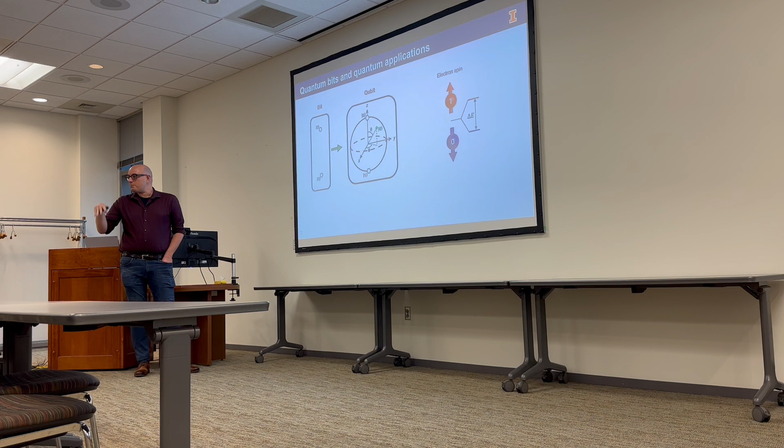You can think about electrons flowing or not flowing through a transistor, encoding 1 or 0, or magnetic domains in your hard drive pointing up or down that encode long-term memory. But quantum physics tells us that we can have more than just occupying one of these two states—we can occupy a larger dimensional state space, which we describe with this so-called Bloch sphere.

If we take a quintessential quantum particle, like an electron, and apply a magnetic field, its spin states, or magnetic states, split into two by the Zeeman effect, giving us two discrete energy levels we can occupy that basically look at that electron either aligned or anti-aligned with that field.

But what this Bloch sphere really tells us, and what quantum mechanics tells us, is that we can also create states that have unique superpositions of being something like up and down at the same time, with a unique quantum phase that describes where we are in this larger dimensional state space.

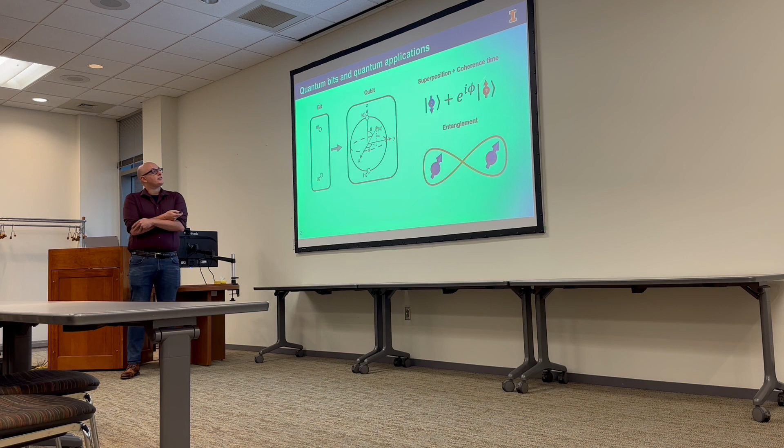When I say the word coherence time, I'm saying: if I create one of these superposition states, one of these unique quantum states, how long does this phase last before it gets scrambled and interacts with the environment? And then, of course, there's not just superposition, there's also this property of quantum entanglement, where the measurements and operations on one qubit can instantaneously affect another.

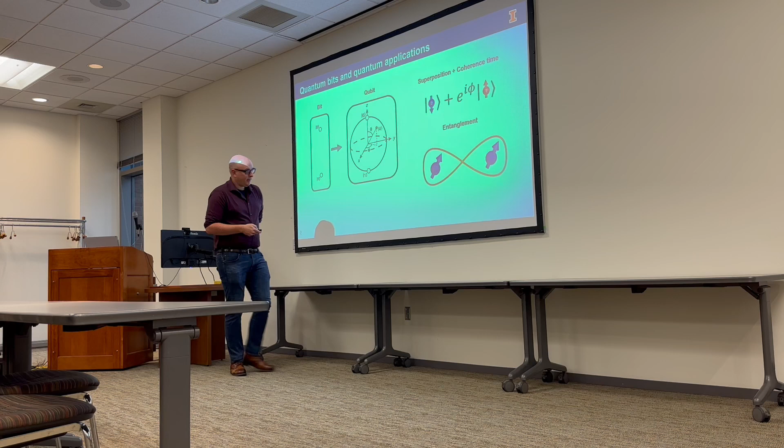And of course, this is famously what Einstein called spooky action at a distance.

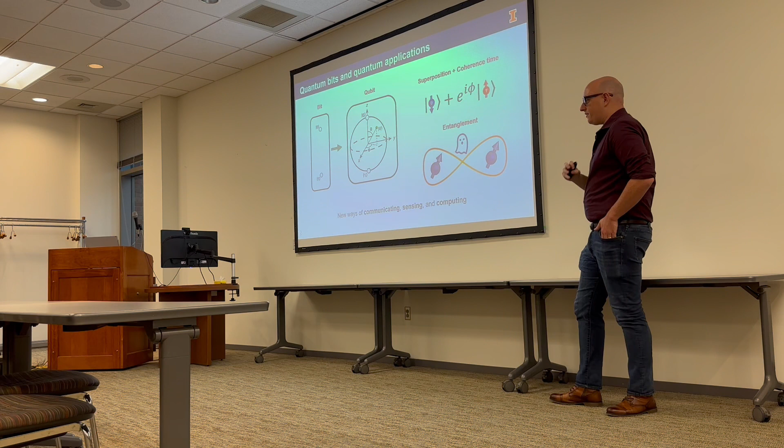The reason people are excited about this is because all of these features in quantum physics let us design and build new devices that give us new ways of communicating, new ways of sensing, and new ways of computing. So quantum computers are this buzzword topic that everyone wants.

But what I'll be focusing on is not quantum computing, but something a little bit different—this idea of a quantum internet.

I'm always in awe of the regular internet, about how our cell phones talk to satellites in space to give us internet, and we have Zoom calls across the country. All of that technology and societal and technological advance is underpinned by this huge infrastructure we take for granted, which is basically the distribution of information at long distances with routers and amplifiers.

Things like modems to hook our computers up to those networks, and then of course the computers themselves that have the capability to do this.

What I get so excited about in my research is, how do we translate all of that backbone infrastructure to the quantum world? How do we build quantum routers and amplifiers? How do we build quantum modems? That's what I'll be focusing on in the rest of the talk.

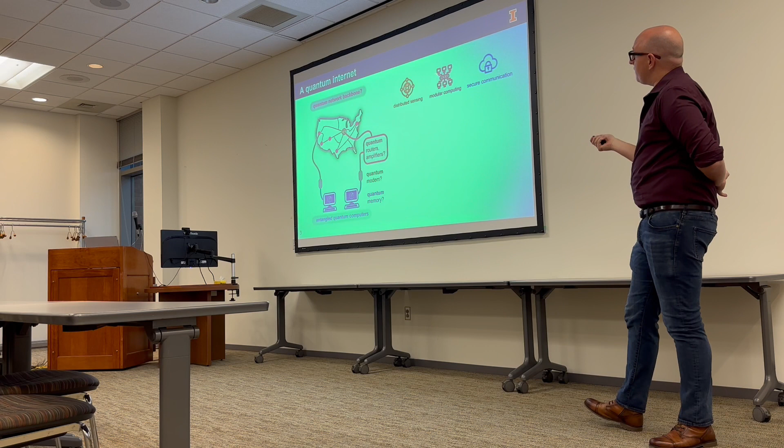The reason you would care to do this is, if you're able to realize this dream of a quantum network or so-called quantum internet, you can do really cool applications like distributed quantum sensing, making modular, powerful quantum computers in the same way we have computing clusters linked by the regular internet, making things like AWS cloud services.

We can do that for quantum computing. And then we can also build things that have secure communications, where our communication is fundamentally secured by the laws of physics, using the power of quantum physics. And so the dream I'm hoping to sell you is taking this quintessential quantum two-level system, a single electron, and then using light to couple them together quantum mechanically.

Maybe I don't have to convince you all, but light is sort of the only reasonable way you could think about doing this, right? Light travels at the speed of light, essentially infinitely fast. It's wide bandwidth, and you can confine it into optical fiber and distribute it all around the city, the state, the country. But maybe what's less obvious is there's also this other feature of photons that we like.

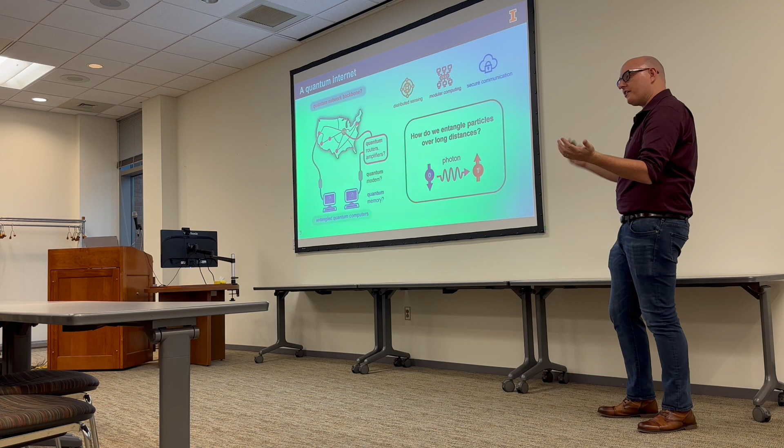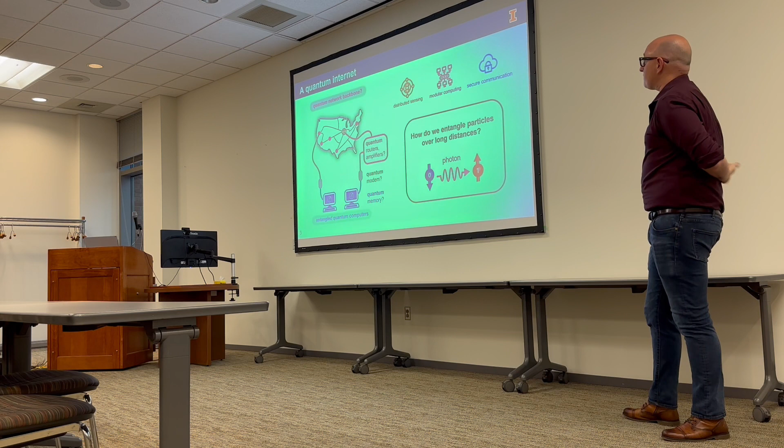There's no background occupation of photons at room temperature. So if I turn the lights out in this room, if I took an infrared camera, everything's glowing like this weird red color, right? But if I use my eyes, I don't see anything. So when you turn the lights off, there's not enough thermal energy to create background visible photons. We can use that to say there's no background noise for our quantum channel at room temperature with visible and near-infrared light, and that's amazing for these applications. And of course, there's fun physics as well.

Last year's, actually two years ago, Nobel Prize in Physics was related to these dreams of entangled photons and looking at non-locality and distributed photons.

So the types of electron spins I'll be telling you about are these defects in solids. If I take a system like diamond, and I remove some carbon atoms, I get a vacancy, a missing atom, and I can put that vacancy next to a nitrogen impurity. This NV center, this nitrogen vacancy center, this defect can trap some electrons, and those electrons have both spin structure and optical structure that we can use to form a qubit.

We like to think of these systems like trapped atoms in a solid. So we have absorption and emission of single photons, this interface to light, combined with a long-lived ground state that we can use to do quantum information processing tasks. I'll describe this a little bit later.

So this NV diamond is great. It's like a little trapped defect atom-like thing in a crystal. And these systems are amazing. They've been used for really amazing proof of principle demonstrations and applications for quantum science, like measuring molecules, doing quantum computing, teleporting quantum states over long distances.

I always say this, but if there's one thing I hope you get from this talk, it's that this NV center in diamond, which has been a workhorse in the field for the past 15 years, is not unique. On one hand, there are different defects in diamond that one can utilize, but there are also defects in different materials that one can use to form a qubit.

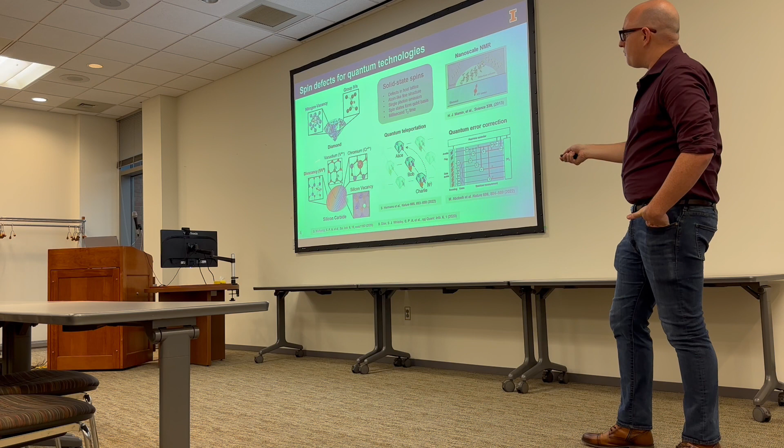And so the material I'll be focusing on today is this material silicon carbide, which I love. Over the past 5 years, we've discovered all these different qubits, all these different defects that we can form inside. The one I'll be focusing on today is this divacancy - simply just a missing carbon atom next to a missing silicon atom in this silicon carbide lattice.

So the next question you might ask is, okay, there's diamond, there's silicon carbide, maybe there's other materials. Why would you choose one material over another? And the first answer is that silicon carbide is a wafer-scale semiconductor.

So here's a 4-inch wafer of silicon carbide and a tiny 2x2 millimeter chip of diamond. These two samples cost around the same price, all while silicon carbide is basically just imitation diamond. It's used in fake diamond jewelry, it's hard, it's chemically inert. If you go to the jewelry store and buy fake diamond jewelry, it's either cubic zirconia or it's something called moissanite, which is just silicon carbide. So it's like fake diamond, but cheap and wafer scale.

That's great. But on top of that, you can also make real electronic devices with it. So it's found wide use in power electronics. You can really dope it. It's a real semiconductor.

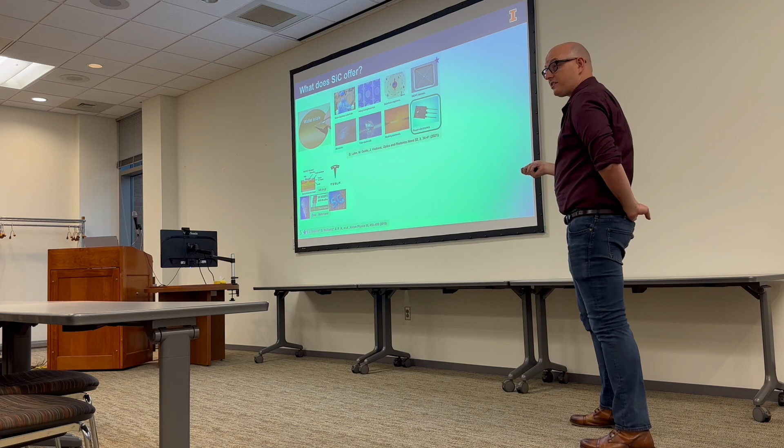And you can make things like LED light bulbs, 5G technologies, MOSFETs. And the real reason it's so mature today is because Tesla really likes this for EVs, for high voltage applications.

I always like to show this image, but the New York Times wrote this amazing article which asks what are the materials beyond silicon that can revolutionize our society and the technologies we have today? And they identified silicon carbide as one of them. I think this article's fun because it features a photo of my hands holding a little chip of silicon carbide that'll produce some of the data you'll see in the next few slides.

And of course, for the engineers in the audience, there's also this huge Chips and Science Act in the US about boosting semiconductor manufacturing, and billion-dollar fabrication facilities in silicon carbide have been popping up. There's a fun quote from the New York State governor that basically says, yeah, Silicon Valley, that's totally overrated, we're going to be making this new Silicon Carbide Valley. This is the future. There's a lot of excitement about this material, which is very exciting for me.

But of course, I'm not really a classical electronics person, I don't do power electronics. So the things I think are relevant for hopefully some of you in the audience are the other features we love about this material: our ability to make high quality factor on-chip integrated photonics with it, and that these electron spins I told you about are very, very good quantum states that we can control.

What we like to say is that silicon carbide is in this perfect Goldilocks zone between our traditional quantum workhorse of diamond, and our old friend silicon, the classical workhorse for all the technologies around us, where we uniquely combine the ability to do CMOS compatible wafer-scale electronics and photonics, and this optical readout and polarization of coherent single qubits that we can play with.

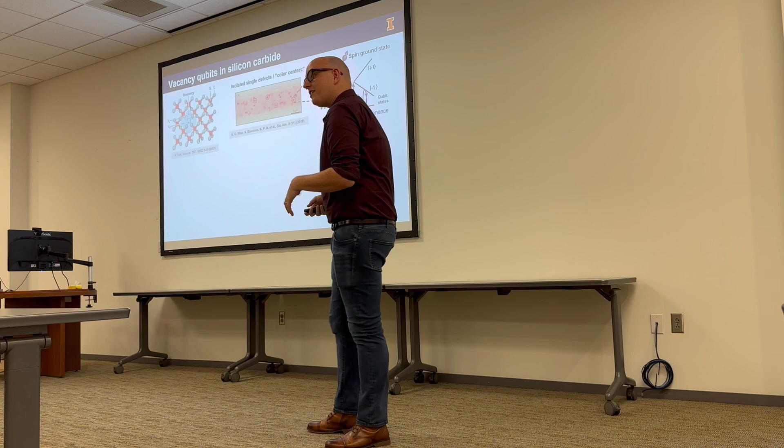And they have to do a lot with the details of this sort of structure here. You sort of need to think like a chemist, as you were saying. So I think some of those questions will be answered in this slide, but does that help a little bit? Some, okay, yes. We can talk later too.

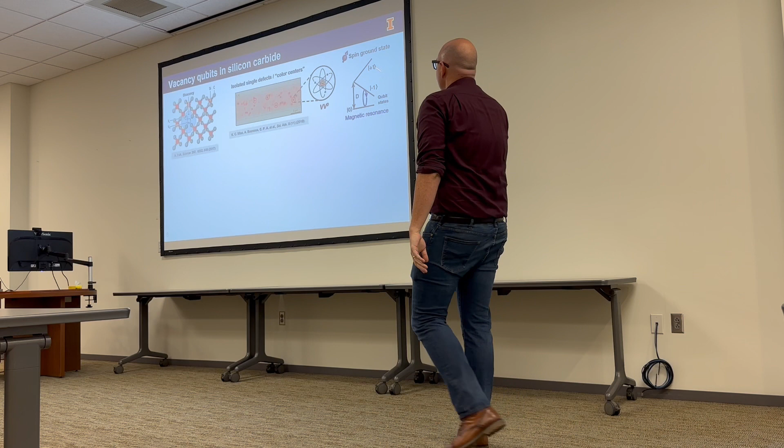Thanks. So partly to answer your question, in this divacancy the ground state is a spin triplet. So there's not one unpaired electron, there's actually two, just because of the structure of the system. They sort of pair up to make this triplet state. So we have an ms equals 0 state, a projection 0 magnetic state, and then we have this plus minus 1 state. That's totally fine, we just use two of them as our two-level system.

Because it's a simple electron spin, we can apply DC fields to shift the energies around, and we can apply AC fields to do spin rotations. This is the same physics that goes into an MRI machine or an ESR machine. So we can use magnetic resonance techniques to manipulate this single electron.

Can you use strain in the crystal? Yes, so we've actually done that. This paper right here, we made a MEMS device, and we use sound to manipulate our electron spin, not microwaves. That's one of the advantages of silicon carbide, you can make really sweet MEMS devices with it.

So I keep saying the system looks like a trapped atom. We have a spin ground state, but we also have these orbital excited states. If we cool the system down to low temperatures, these orbital states resolve, once again like a trapped atom. You have your hydrogen, there's selection rules, there's optical transitions, there's hyperfine states. Same physics here, where we have our three ground states, and then we have these excited state orbitals that we can address with narrow line lasers.

And once again, an analogy to atomic physics, there's selection rules. It turns out that for this system, certain ground states couple to certain orbital excited states, and other spin ground states couple to a totally different set of orbital excited states. And those are separated in frequency, and they're resolved.

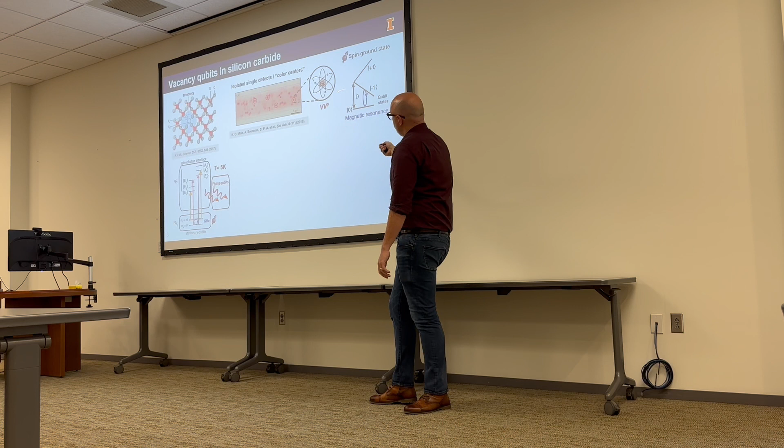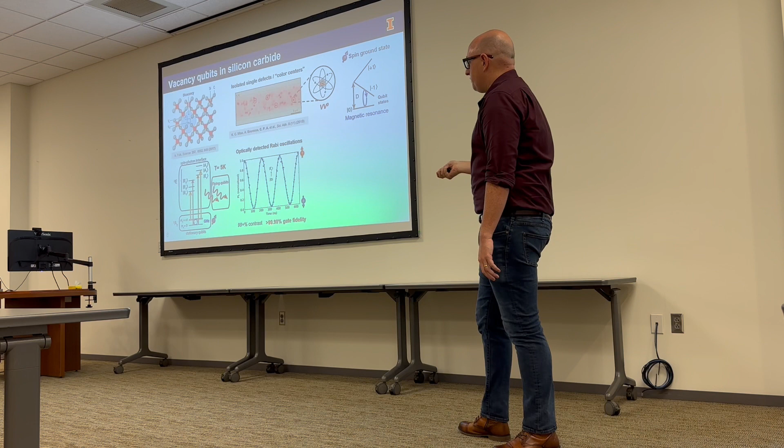So if we take a narrow line laser, we can do spin-dependent fluorescence, and we can play all the tricks from atomic physics to optically pump and optically read out our single spin. And if we combine that with this magnetic spin rotation, we can do optically detected Rabi oscillations of a single electron in this solid. I won't show you the details, but we can do this with extremely high contrast and gate fidelity. So we have very exquisite control of this quantum system.

One of the other benefits of being in this solid state platform is we're surrounded by a bunch of other atoms. That's a blessing and a curse. Some of those atoms have a nuclear magnetic moment, they're like little magnetic bar magnets. But the problem is they fluctuate all over the place. They cause noise, but those little bar magnets can also be other two-level systems that we can couple to and use as quantum memories. We like this because nuclear spins are basically the longest lived quantum object that's known to science. Their lifetimes can be hours, minutes, days.

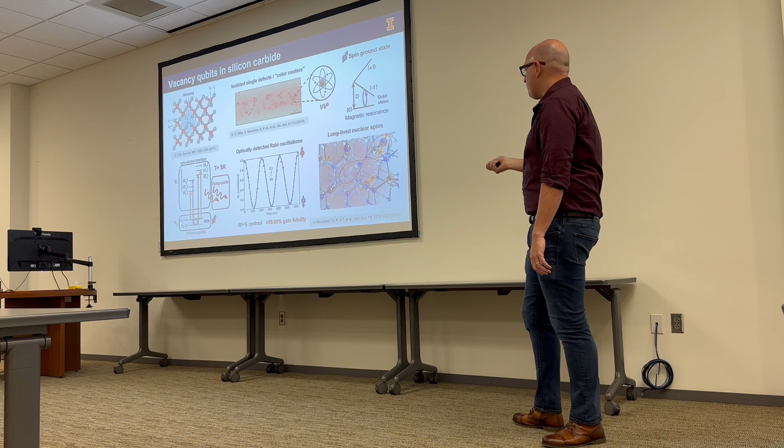And so having them immediately accessible, we can think about magnetically coupling to those nuclear spins. What we've actually been able to do is entangle a single electron and a single nuclear spin that are locally in this lattice, and think about using that as a quantum memory.

This is sort of the highlight reel. Other things that we've been able to do in this divacancy system in silicon carbide is we recently demonstrated what we think is the world record longest electron spin coherence ever measured in a solid. So basically we have the best electron qubit in a solid that's ever been measured, with a coherence time that's over 5 seconds. That's an exceptionally long coherence time for these solid state systems.

What's the temperature? This is all 5 Kelvin.

Is there the same question? Oh, nice, okay. I guess I should put the 5K over here or something.

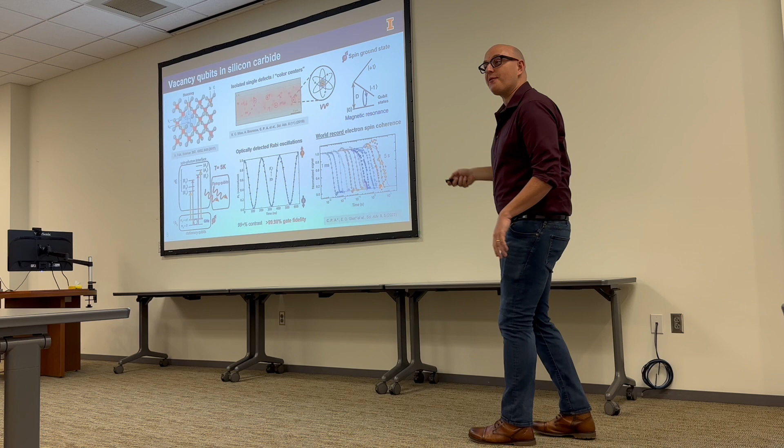So how do we mediate interactions? We have this spin-selective optical absorption and emission. If I create a superposition state of an electron pointing up and down at the same time, and I try to spin-selectively scatter light off of it, I go from up plus down scattering light to being up and scattering light, plus down and nothing happening. This spin selectivity automatically lets me convert a spin superposition state into what we call a spin-photon entangled state, just from the selection rules of this optical absorption and emission. We can use that state to mediate interactions between distant qubits by having light do the talking in this spin-selective way.

We can do that by interfering light on a beam splitter and using single photon detectors. How does this work? We essentially do an analog of Hong-Ou-Mandel, sometimes called DLCZ-type interference. We have a 50-50 beam splitter, and two identical single photons that come into port A and B. I mean truly identical - same frequency, same phase, same arrival times, overlapping spatial modes on this beam splitter. It's a really stringent requirement. If those two photons are truly identical, there's an interference that happens at this beam splitter where they either bunch up in port C together, or bunch up in port D together. This is Hong-Ou-Mandel interference.

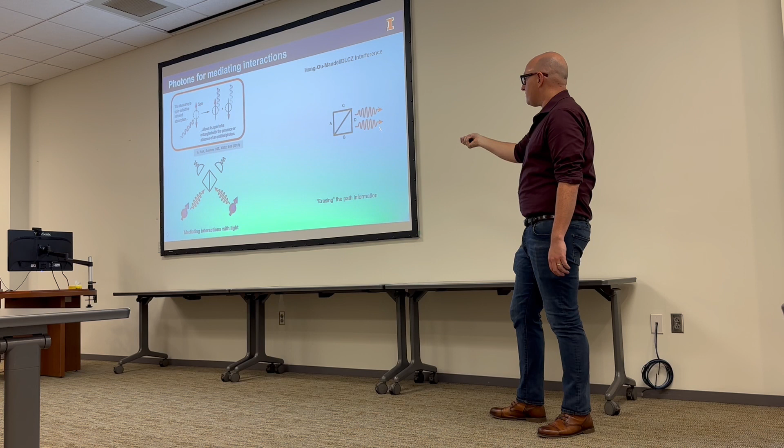Quantum mechanically, this means you've erased the path information of where the photon came from. These photons are identical, they're exiting the same port, so I can't label which of these two photons came from A and which came from B. That erasure of path information from this interference effect, we can harness.

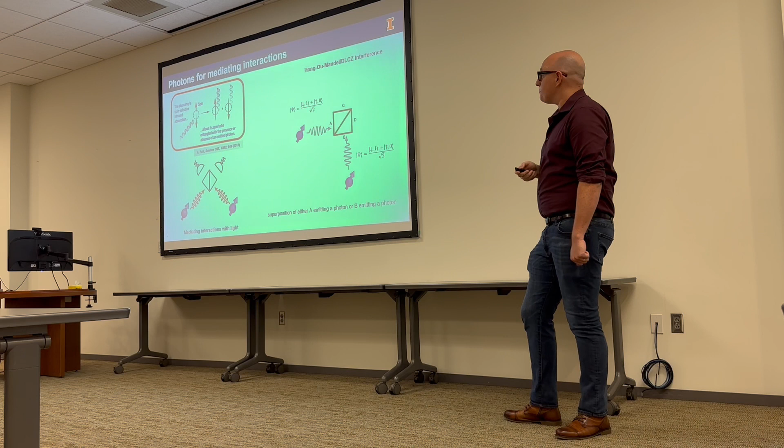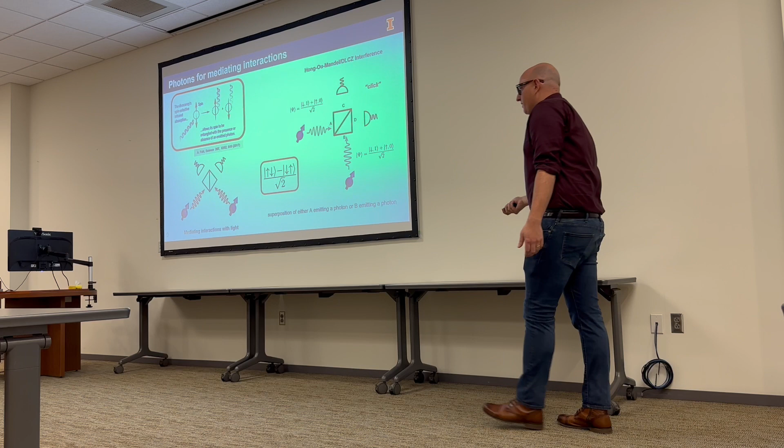So if we create one of these spin-photon entangled states at each of these ports, and interfere those states on the beam splitter, and measure one single click and one single click only, in a sense we know one of the two spins was up and scattered a photon, but we've erased the information of which one it is, and we know the other one had to be down because we didn't see two photons. Quantum mechanically, that means we've created this entangled state, where if we measure one to be up, the other is down, and if we measure one to be down, the other is up. So we can mediate long distance entanglement between two spins just by using light.

This can be at arbitrarily long distances, which is what we like. So now we can dream about this quantum internet, entangling things over long distances using light. But there's a big problem, which is that photons aren't perfect. They're really, really good carriers of information, but not perfect carriers of information. Even at telecom, in the telecom band, you have something like 0.2 dB per kilometer. So what that means in practice is if I'm trying to send a single photon from, say, Stanford to Illinois, I have to try 10 to the 77 times to succeed once.

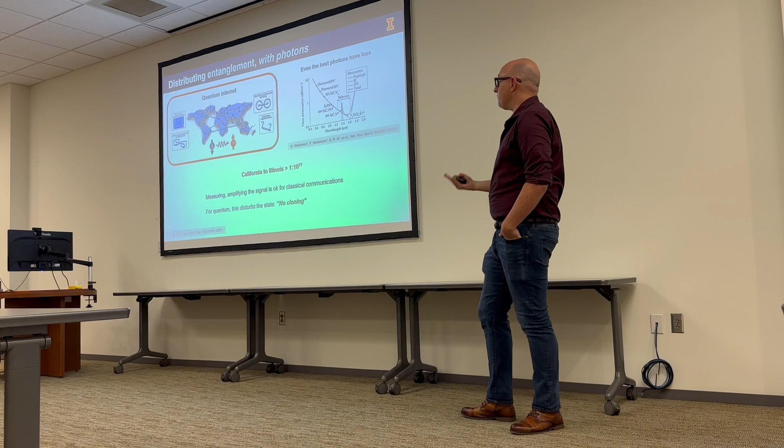It's totally unacceptable for anything quantum and for anything classical as well. The reason we can do anything is we just have amplifiers everywhere - all around you, there's just amplifiers everywhere. The problem is, quantum mechanically, we can't copy, amplify, measure, and repeat quantum states without disturbing them. There's this so-called no-cloning theorem in quantum mechanics. Basically, the act of measuring something, looking at it, trying to copy it, disturbs it. So that's horrible - that means my dream is dead. That would be really bad.

Luckily, there's a pathway to get around this, by building something called a quantum repeater. This repeater works by breaking up your overall photonic link into segments. So if I'm trying to make A and C entangled together, I'll introduce an intermediate node B. First, I'll entangle A and B together using this photon-mediated scheme. Then I'll take half of the entangled state that was at B and store it off to the side in some quantum memory, just say 'hold on for a second.' And then I'll entangle B and C together.

Once at B, I have two halves of two separate entangled states. I can do a local measurement and gate to fuse those two independent links into one overall link between the end nodes. Sometimes this is called entanglement swapping. It's a form of quantum teleportation. There are lots of funny words describing how this works.

So the other question is, why would you do this trick to make these two end nodes entangled? Basically, what you've done is turned one very improbable success that requires transmitting a photon over the whole link length into two independent processes that are much more likely. You can have some high probability thing work, hold onto it, and then do something else that's high probability, and combine the two instead of waiting for this exponential link to work.

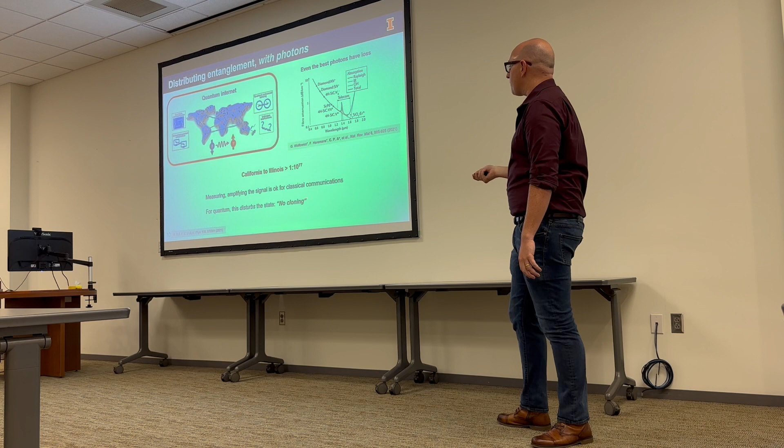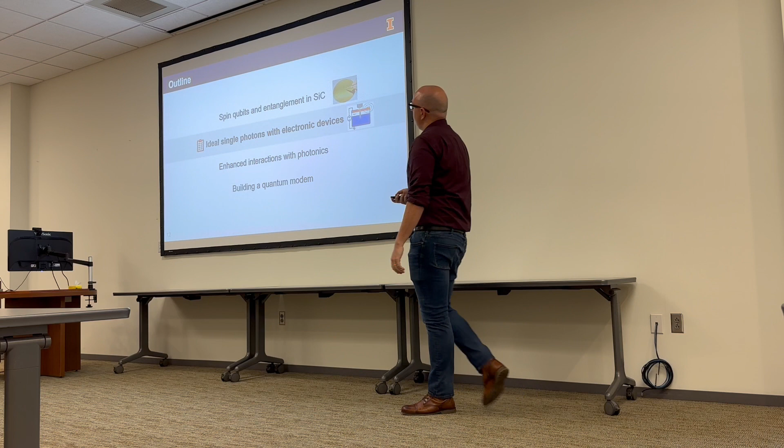Now, the nice thing is we can realize this tech with spins in solids. We can entangle them over long distances, and we have these nuclear spins as local memories. There are some things we need to do to make this work, but what I'll focus on for the rest of the talk is this requirement of having those photons be indistinguishable — having really coherent single photon emission is really hard. If they're not perfect, this entanglement doesn't happen with high efficiency. That's where the next part of the talk comes in.

We can take these electronic devices, like the same wafer that might go into a Tesla — they might be shipped off to Elon somewhere, I don't know where he'd be getting these chips — and get a PIN diode, a very simple electrical device. Inside this intrinsic region, we can introduce these defects. We can measure their luminescence; they're good single photon emitters. Here's a bunch of randomly distributed defects in this commercially made PIN diode.

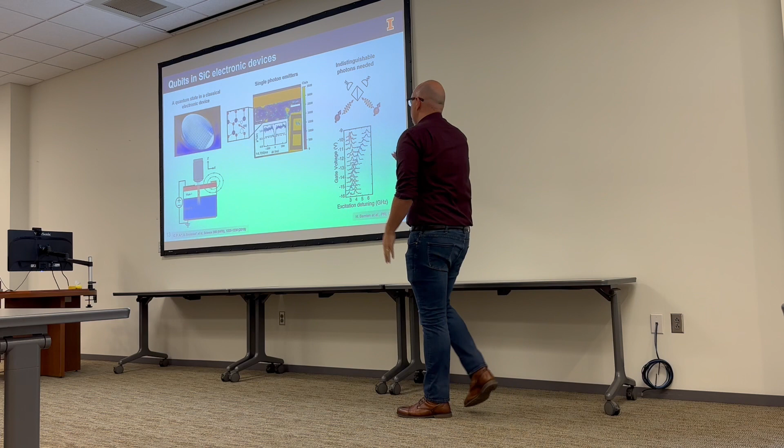Why would we do this? Well, I told you getting these photons to be indistinguishable is hard. One reason is that each defect in this solid is its own special butterfly — there's local strain, local stray fields that shift the emission frequency around so each defect emits at a different frequency. That means this interference with the beam splitter wouldn't work. If you're an atomic physicist, every atom is the same, there's no problem. In a solid state, each defect is a little special.

But we have this ability to apply electric fields and do Stark shifting, or use the Stark effect, just like in an atom, to shift our emission lines so they overlap with each other. Because we have this in a PIN diode, we can do high fields in a very controlled way, integrated in this device. So we can take this narrow spin-selective optical structure and tune it by over a terahertz just by applying a voltage — an extreme amount of tunability.

This is maybe a small detail, but it's important. For the electrical engineers in the audience, this might be familiar: the problem is we have a p-type layer, something we think is intrinsic, and an n-type substrate. But our intrinsic layer is slightly n-type doped. We know that when you put a p-type semiconductor and an n-type semiconductor together, you get this depletion region at the interface, so our electric field gets dropped with this triangular shape at that interface.

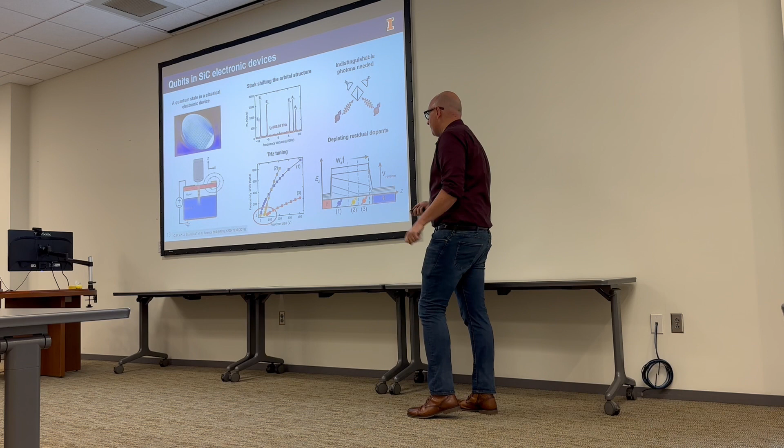It'll become obvious why I'm talking about this in the next slide, because it's not very interesting on its own, but it becomes important for understanding what comes next. There's this field profile and depletion physics in the semiconductor driving how these fields move around in this device.

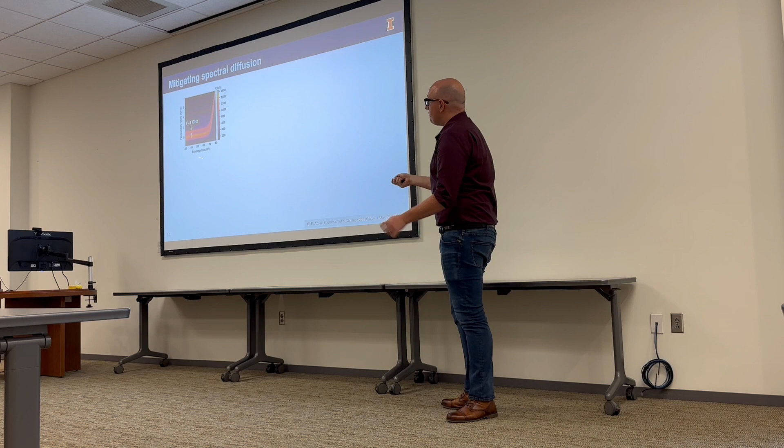So we have this optical emission, we're applying voltage, at first nothing happens, but around 70 volts it starts to shift. But it's not just shifting, it's also narrowing. That's exciting because each of these defects feels local strain and local electric fields, and I can shift them with electric fields.

Solids are horrible places for single photon emitters to live because they're sensitive to stray fields, and solids are just noise—there's free electrons and holes everywhere, fluctuating around. So our line basically jitters around because of this local electrical noise.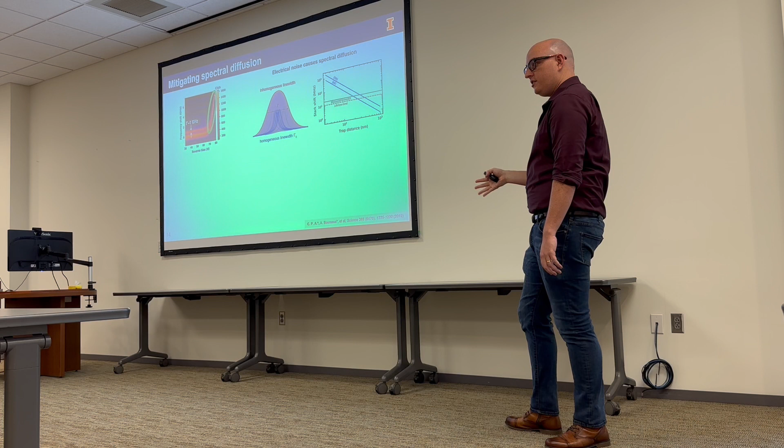We call this inhomogeneous broadening. It turns out our system is so sensitive that we can sense the presence or absence of a single electron something like 200 nanometers away from our defect. So if there's any fluctuating carriers, you're screwed and your line gets broad.

That's why this narrowing is exciting, because it's telling you that under zero field you have this fluctuating bath of crap. If you start applying a field, you get this electric field in your crystal, you get this depletion physics. Those electrons and holes drift and diffuse away from your region of interest until you're left with a near perfect environment for your quantum system to live in that has no fluctuating carriers.

There's nothing weird going on here, it's just the same physics as a PIN diode or PN diode, where there's no fluctuating carriers in this depletion region. So our system is basically almost Fourier limited, almost at the fundamental limit of how good this linewidth can be. It's rock steady over 3 hours, and we can tune it 40,000 linewidths. It really turns into this almost ideal single photon emitter.

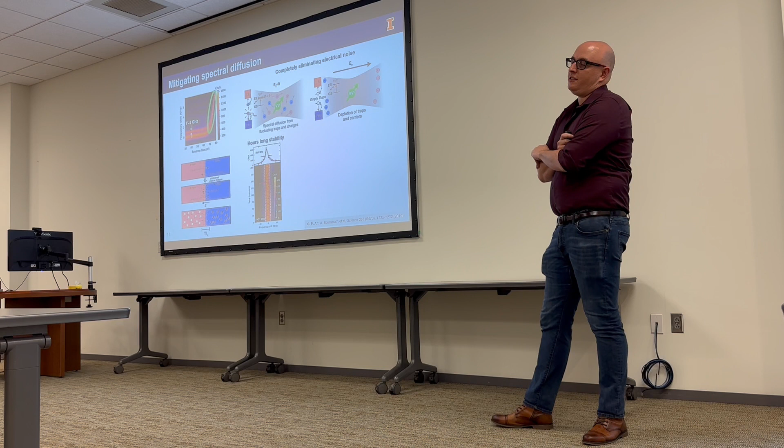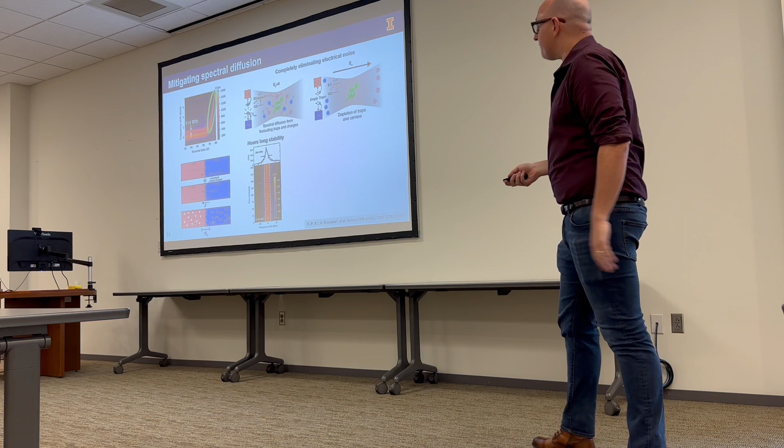This is in reverse bias, below the breakdown voltage. And that's one of the benefits of having this high breakdown—we were not limited by the breakdown of the semiconductor, we were just limited because we had a Keithley source that went to 200 volts. That was it, we could have gone more. Maybe we should have. But this thing narrows, which is great.

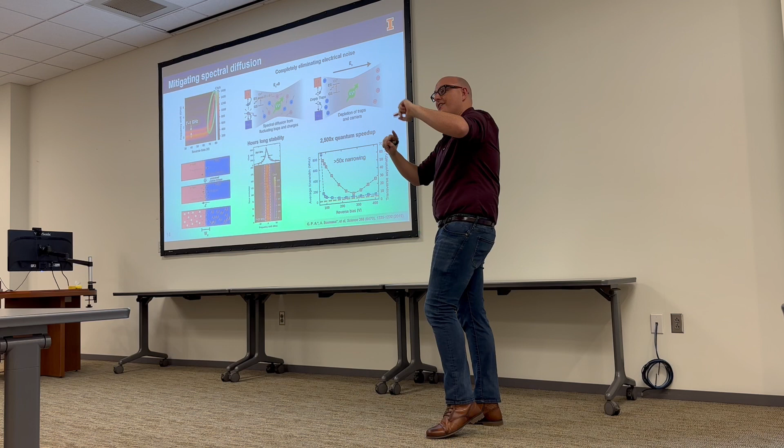If I told you these photons need to be indistinguishable when they hit the beam splitter, if both of them are jittering around in frequency, that interference doesn't happen with high fidelity. It turns out that basically a factor of 50 in narrowing, which is what we showed for two photons interfering, is maybe something like a factor of 50 squared in the speedup of the interference.

What temperature is that using? This is all 5 Kelvin.

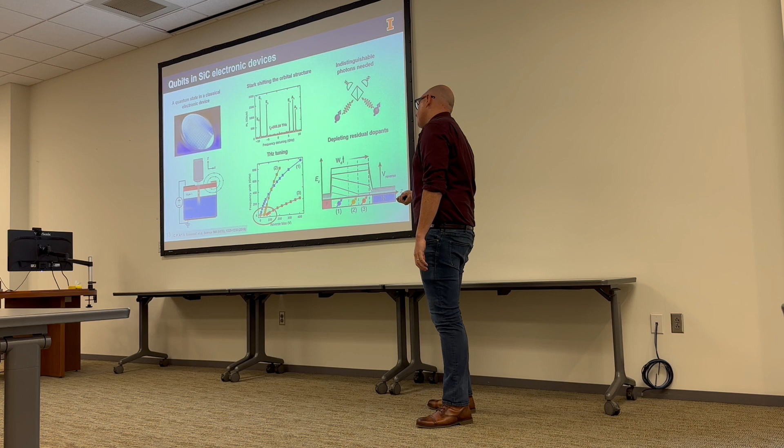Does it matter how deep your defect is? Yes, it basically just sets the voltage at which this depletion happens. The problem is also, if this defect becomes too close to either of the doped surfaces, each of those doped layers is like a big fluctuating bath of stuff. So that's also a problem—it does matter a little bit, but those are the trade-offs.

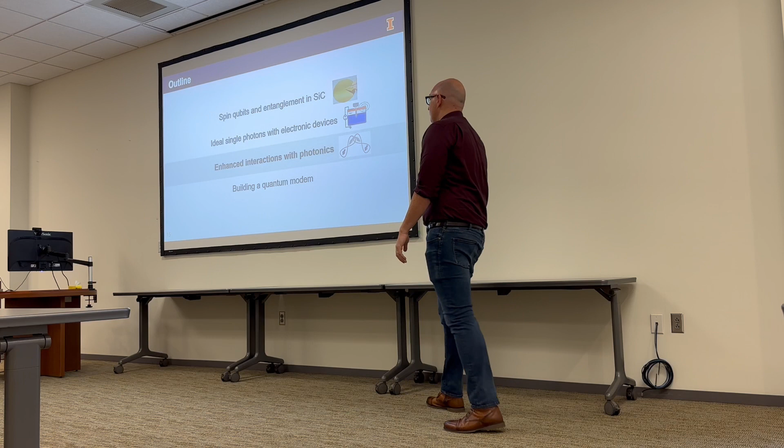Okay, so next part, which is I guess why I'm here at all, is making photonics with this platform and using it to do better quantum interactions. We want light to do the talking, and so making photonics to guide and enhance that interaction is the next step here. If my dream is to make these silicon carbide networks, we've gone through and hit a lot of our check marks to make a great system.

The really only remaining thing is that dipole sources of light, things like light bulbs, LEDs, not lasers, they shoot photons everywhere. They're quasi-isotropic broad emitters of light. And if I want photons to interact with something and mediate interaction, I don't want a photon to go hit a wall and do nothing useful for me.

This is a problem, but there's a nice solution from optics, which many of you probably know: if you put your two-level system in an optical cavity, you can engineer the density of states and funnel its emission into a particular spectral mode and spatial mode. That's exactly what you want to do. You want to shoot those photons and have them interact with another quantum system, not go off and do something not useful. We can do this through the Purcell effect, using very high quality factor photonic devices that are also small mode volume. With high Q, small mode volume, we can do this energy funneling with very high efficiency to make ideal single photon emission that's not only narrow and tunable, but also directional.

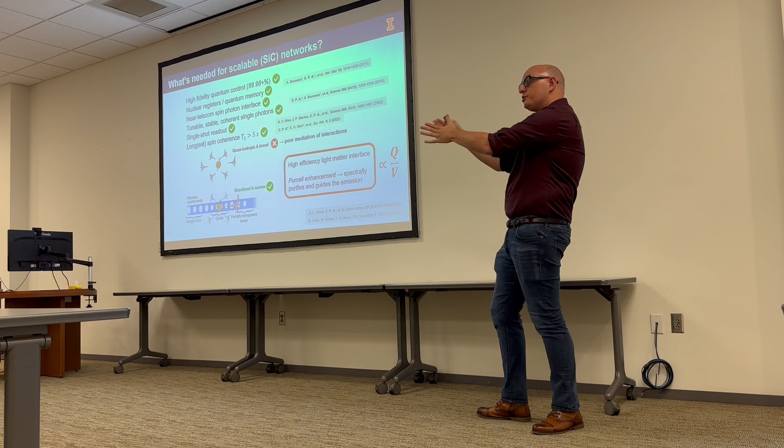So we want to make silicon carbide photonics. Many of you are probably aware of the wonders of silicon on insulator, or silicon photonics. Basically we want to make silicon carbide on insulator and silicon carbide thin film photonics. Step one is you make a thin film on insulator, or on a lower index of refraction material. Once you have that thin film, you can etch it into waveguides surrounded on all other sides by a lower index of refraction material, so that the light gets trapped in the waveguide, and you can make structures that guide light on your chip.

The way that we make these thin films is very stupid. There's a few ways you can do it, but the way that we like is very stupid. We take this quantum grade silicon carbide, bond it to either a silicon thermal oxide wafer or just glass, stick them together, and then take a grinding wheel, or basically sandpaper, and mechanically remove 99.999% of the original material until we only have a micron film left. We go over with a CMP to make it smooth and perfect.

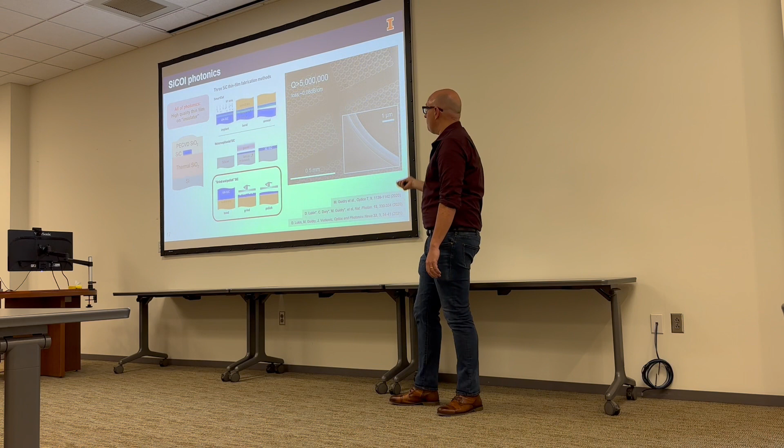Once we have that film, we can etch it using very easy etching techniques into nice high quality factor optical resonators, all on a chip. Here are some ring resonators where the light is circulating in this ring. The etches look great, which is a big plus for us, especially over diamond. The losses are very low and the quality factors can be quite high. So we have this ability to make high Q, low mode volume, integrated photonics, all in silicon carbide.

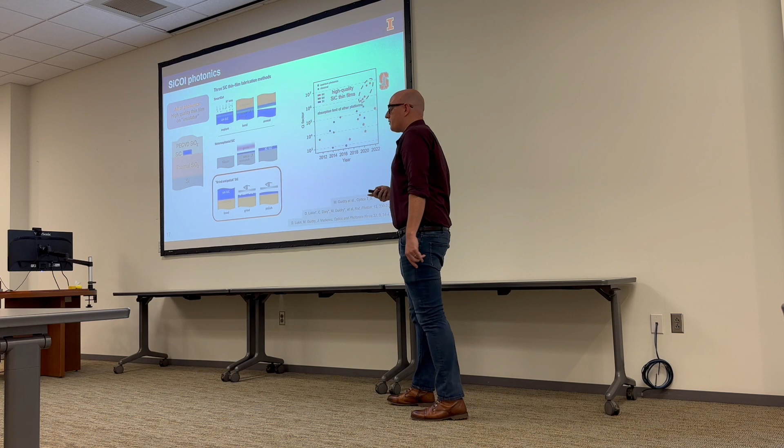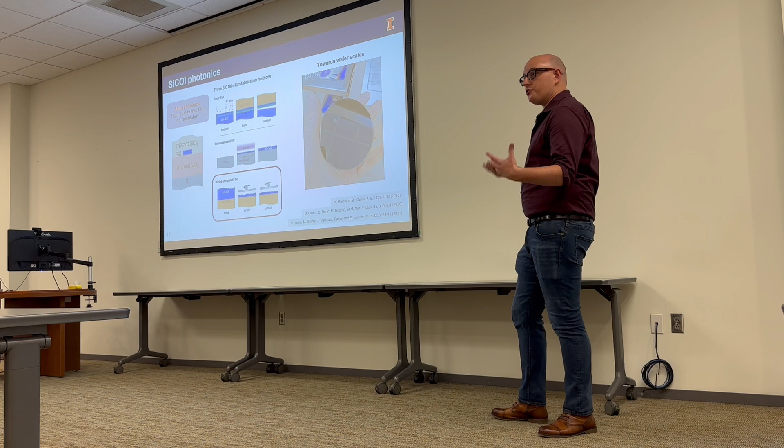Over the past few years, we've really been boosting up the quality factors in the system to almost 10 million, which we're excited about. Not only that, we're also pushing towards the wafer scale. Here's a photo of me holding a 4-inch wafer of silicon carbide bonded to a thermal oxide wafer. So we can start dreaming of big integrated photonic systems.

The result of those advances is basically, we think we have all these check marks that we need to do something useful. We have great spins, but we also have great scalable photonics. What I didn't show you is we can also put these single spin qubits inside of those photonics and they remain fairly coherent. So we think we have all these check marks to maybe realizing some of these big dreams for quantum networks.

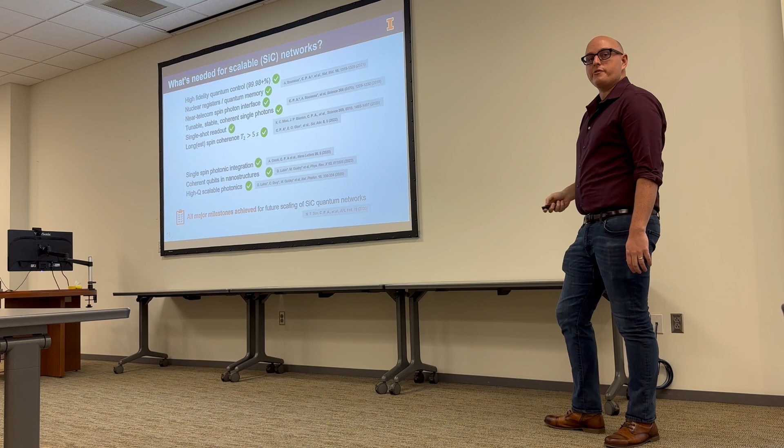So I hope I've gotten you a little excited about this silicon carbide platform. We have the best spin qubits ever measured, working at 4K, with narrow and tunable single photon emission. We have nuclear spins that we can play with that are super long-lived, and scalable high-Q photonics for wafer-scale quantum science using the same wafers that Tesla gets, for making repeaters, and maybe even photonic integrated circuits and photonic quantum computing, all monolithically in silicon carbide. So this can make an awesome quantum network backbone.

But of course, these defects don't actually make useful quantum computers, and that's sort of a problem, right? I have a network, but it's not hooked up to anything useful. So why did I spend all that time talking about this? That's what we're going to tackle in the last 10, 15 minutes. This is where the idea of a quantum modem comes in - how do we hook up computers to this fiber optic, light-based entanglement distribution network?

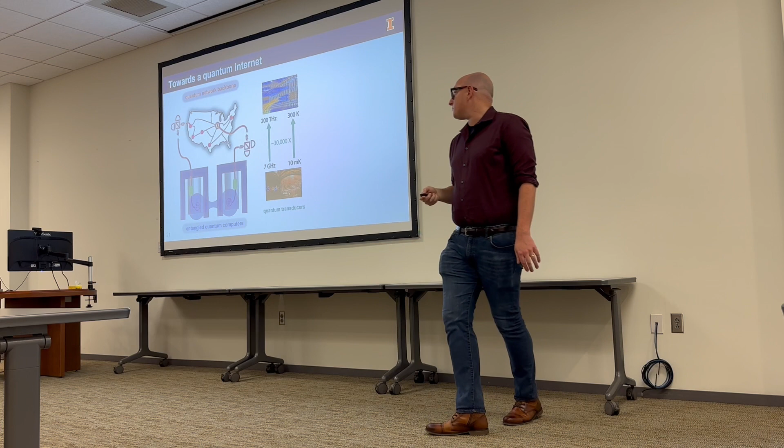So our dream looks something like this: we have our quantum network backbone, and then something like Google's superconducting quantum computer. Google's computer operates in a dilution refrigerator at 10 millikelvin, around 7 gigahertz - gigahertz frequencies, super low temperatures. But our optical network for long haul communications operates at 300 Kelvin and 200 terahertz. So we have a factor of around 30,000 to make up in both temperature and energy, converting these microwave states into optical states to send along the quantum network, to eventually entangle two Google quantum processors together. Luckily there's a way to do this that's pretty simple.

It just uses nonlinear optics or electro-optics. Electro-optics tells you that I can change the index of refraction of a material by applying an electric field, related to this Pockels coefficient, which tells you the nonlinearity. If I can change the index of that material, I can change the phase of light as it passes through it. For those who speak nonlinear optics, this relates to the so-called Chi-2 nonlinearity, a three-wave mixing process. In practice, I can have an optical tone coming into one of these nonlinear crystals, along with a microwave signal, and those two frequencies mix together, giving me a modulated optical signal that encodes my microwave information as a modulation.

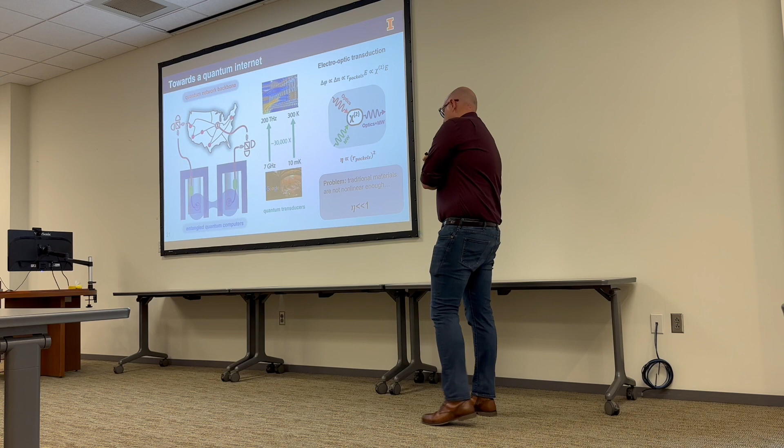You can use this to encode your microwave state onto an optical signal and send it along a network. But the problem is the efficiency of converting a single microwave photon into this modulated optical photon is related to this Pockels coefficient squared. So if this nonlinearity is weak, the efficiencies are really, really bad. The reason we don't have an internet of quantum computers today, at least in part, is because materials are just not nonlinear enough to mediate this interaction with high efficiency. That's the key problem.

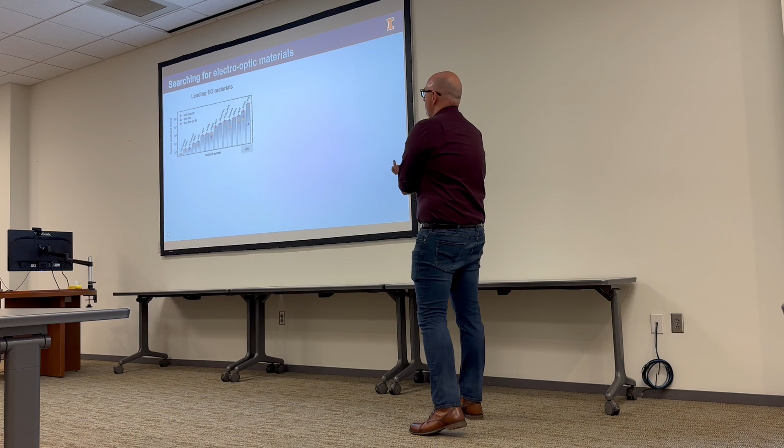So we got really excited about this problem, and started evaluating the common nonlinear optical materials used today, and how we can understand them and maybe do better in the future. There's a great plot from IBM showing different nonlinear optical crystals and their Pockels coefficients, on a log scale - massively different systems. There's a huge range here, so how can we understand why BTO and KTN are so good and why glass is so bad? If we can understand that physics, maybe we can pick something better moving forward.

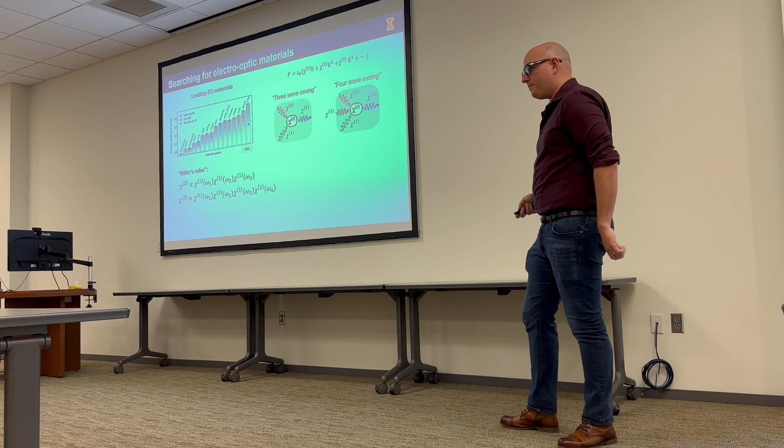Luckily, there's an easy way to understand this physics using a heuristic from optics called Miller's rules. Miller's rules simply state: if I want three waves to mix together in my crystal, I better be linearly susceptible to the three waves that make up the interaction. So if I want to mix three things together, my three things have to make it into the thing that mixes them. This linear susceptibility, Chi-1, is like the index of refraction, or the dielectric constant - your standard susceptibility. So this three-wave mixing term is proportional to the Chi-1, or linear susceptibility, of the three waves that make up the interaction. These higher order nonlinearities are susceptible to the four frequencies that make up the interaction. But this is great, because it lets us design better materials moving forward.

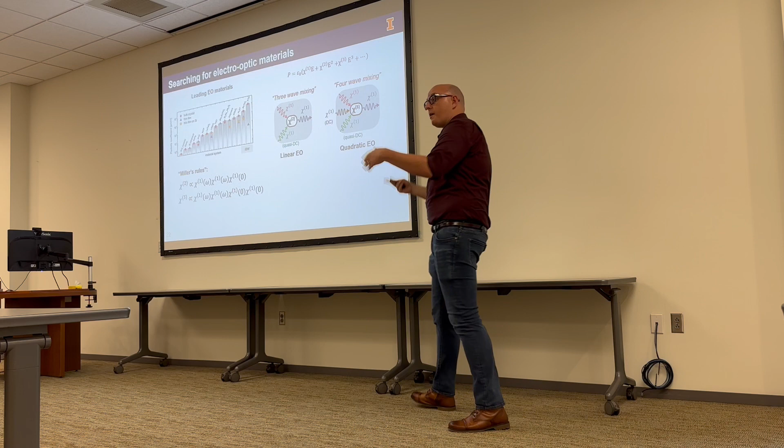For electro-optics, some of these susceptibilities are high frequency, some are low frequency - it's microwaves and optics, a 30,000 difference in energy between those. That's great because materials have drastically different susceptibilities in different frequency ranges. Every optical material you know has an index somewhere between 1 and 5, but the dielectric constant, the DC susceptibility of materials, can be like 0 or like 100,000. There's this huge variation because of extra contributions from slower responding dipoles in the crystal that you can engineer, which don't have any infrared or UV-vis response, but can make the susceptibility in the microwave regime very, very high.

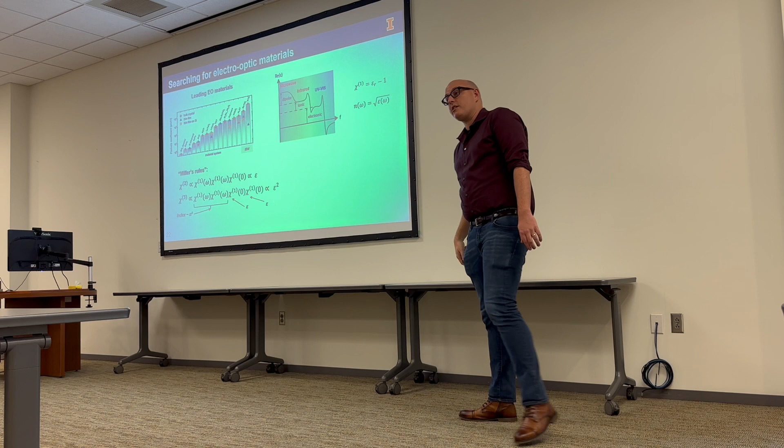So in practice, if I can't engineer the index, maybe what I can do is look for materials that have really strong DC dielectric constants. If I want Chi-2, I want this thing big because I get a linear term with it. If I want Chi-3, I want this thing big because I get it squared. So the moral of the story is, if I want nonlinear optical materials, I just want materials with high DC dielectric constants.

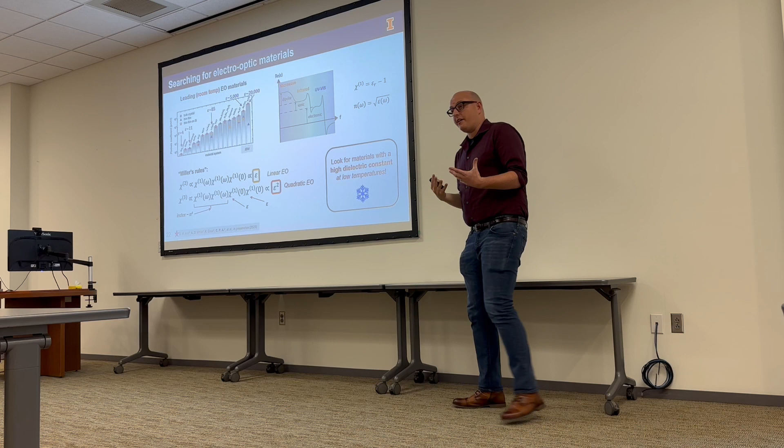That completely explains this entire trend, which is awesome. The problem is these materials were all measured at room temperature. If you want to do quantum nonlinear optics, you need to find materials with a high dielectric constant at low temperatures. So we've understood the physics - we just want to find high dielectric constants at low temperatures.

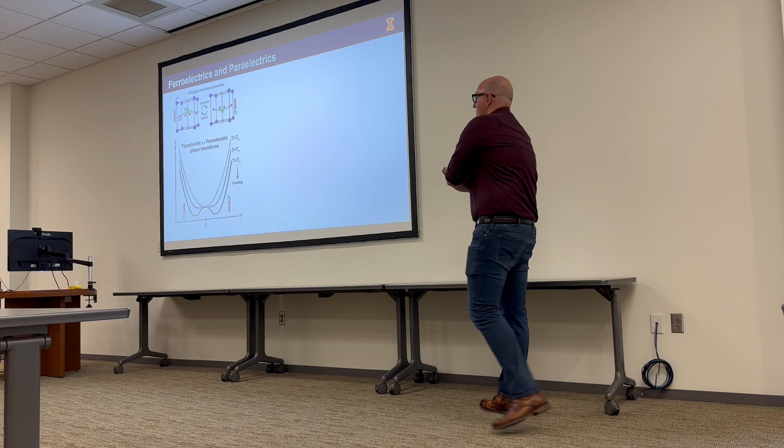The types of systems we can use to find these high dielectric constants are these ferroelectric perovskite materials. There's this B4 ion that rattles around in an oxygen octahedral cage, and it can displace upwards or downwards, giving a net electrical polarization pointing up or down. In analogy to ferromagnets and paramagnets, you can have ferroelectrics and paraelectrics, where there's a Curie temperature, TC, above which the system is nonpolar. It looks harmonic - this is electrical polarization versus energy.

If I try to perturb it, I get this harmonic response of the crystal. But as I approach this phase transition temperature, crossing over between an unpolarized state and dropping into one of these two wells, the energy landscape looks super flat, meaning I can have drastic changes in electrical polarization for basically no energy cost. Then of course, as I cool down further, I drop into one of these harmonic wells again.

What that means in practice is that the dielectric constant, epsilon, of materials blows up as I approach TC. So if I want to engineer a high dielectric constant, I want to find a system that approaches a phase transition. In this case, I want that to be near zero temperature for quantum physics - I want T to be close to zero.

So we've understood the physics that's guided us to this fundamental thing: we just want to find low temperature phase change materials. Once we can do that, we can do awesome nonlinear optics at low temperature.

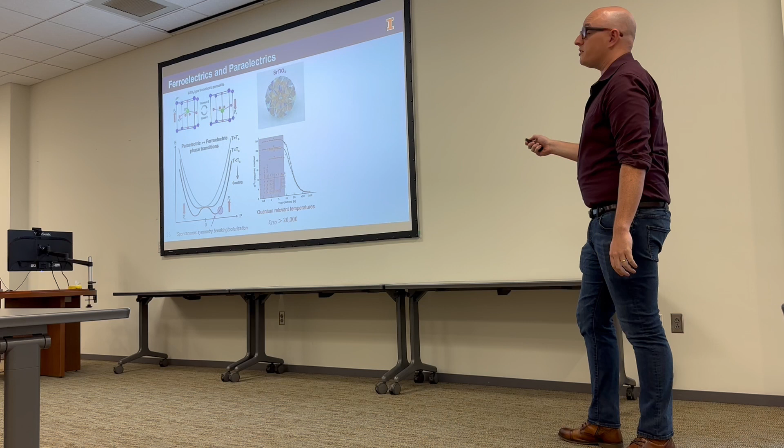The fun part is we found this material - it's strontium titanate. For condensed matter people, this is an old friend. For people who like fake diamonds, it's also a fake diamond. It's one of these ferroelectric perovskites. What's great about strontium titanate is, first of all, it's been studied for like 50 years.

If you cool the system down to low temperature, its dielectric constant explodes and goes over 20,000 at basically all quantum relevant temperatures. Importantly, it goes high and then stays high. I told you that as you approach this phase transition, your dielectric constant explodes, but then you drop into one of these wells and it goes down again. In this case, it goes up, and no matter how cold you go, it never crystallizes - it never undergoes this phase transition. So this is sort of cool.

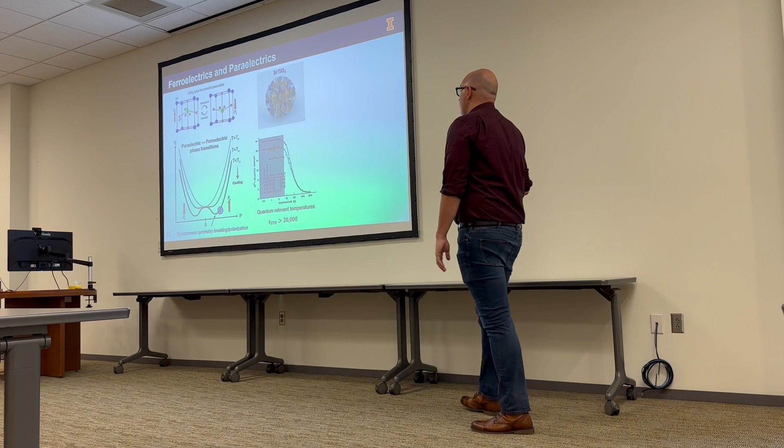This is related to something called the quantum paraelectric phase in strontium titanate. Instead of dropping into one of these two potential energy wells, this barrier is so small and this mode is so floppy that zero-point fluctuations always bounce you back and forth between these two wells, and you never actually crystallize into a phase. So you're always continually approaching a phase transition, but you never reach it.

And that's actually great, because that means dielectric constant's always high, and it's consistent over our entire temperature range. In this case, that also means that our system actually never undergoes this phase transition, it never becomes polar. So our response to DC bias is only ever quadratic.

But since we get this quadratic response with electric field squared, but also dielectric constant squared, if dielectric constant's big, we don't really care. But it does mean that we have to bias this crystal to make it nonlinear.

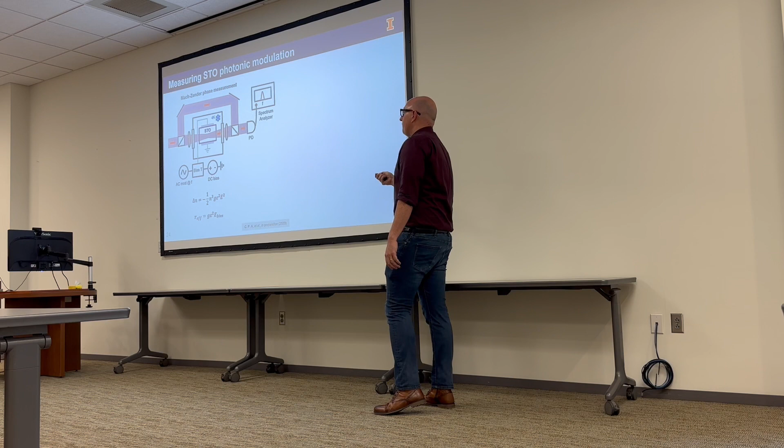And so we can actually do this and measure. We can take a piece of strontium titanate, put it in a cryostat, bias it, and measure its index of refraction change by putting it in a Mach-Zehnder interferometer, where we encode the phase change induced by the material as basically an amplitude change in the output of this interferometer.

This is once again a quadratic electro-optic effect, so we have to bias it, but once again epsilon's huge and we have to square it, so this effect can become quite large.

We can go and measure this response, and indeed, with zero applied bias, nothing happens. We apply more and more bias, and the nonlinearity grows and grows and grows. Already with a bulk crystal, one millimeter, applying just a regular DC power supply, we're seeing nonlinearities that are at least 10 times greater than what lithium niobate has.

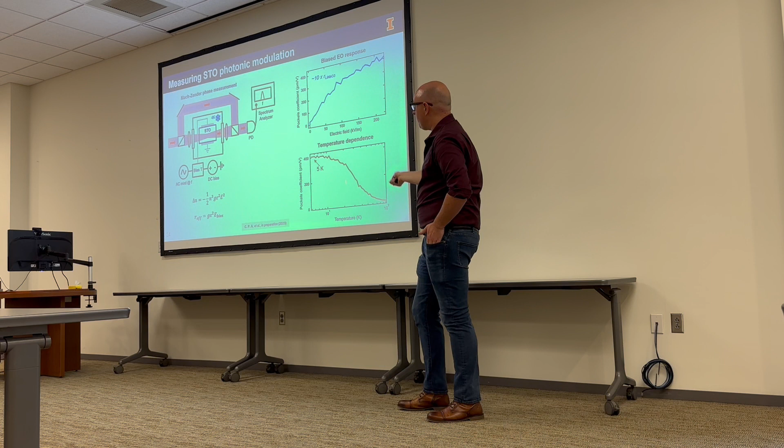It shows this temperature dependence, right, where below 10 to 20 K, it's high. So it has this sort of quantum paraelectric temperature dependence.

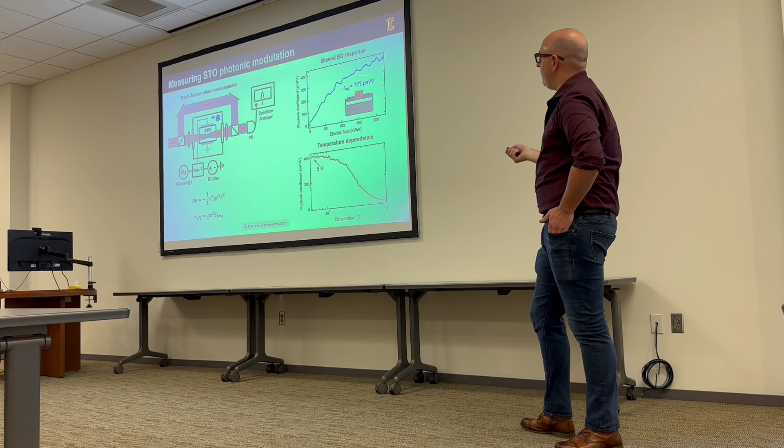But of course, having a one millimeter crystal with a DC power supply across it is not the end goal here. The end goal here is to have some lithium niobate-like integrated photonic chip, where you have electrodes that are biasing the system, but not over one millimeter, but over something like 5 or 10 microns.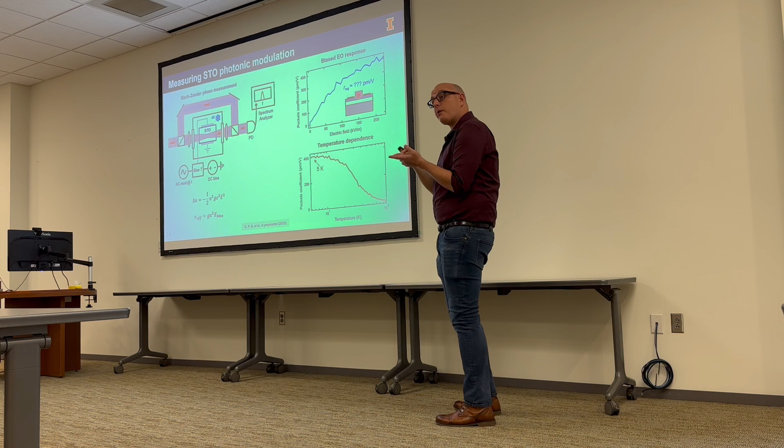And so we actually don't know when we bias more and more what the ultimate limit of this nonlinearity will be. We've already measured something that's the most cryogenically tunable optical material that's ever been measured. It beats lithium niobate, barium titanate. We don't know how high it will be.

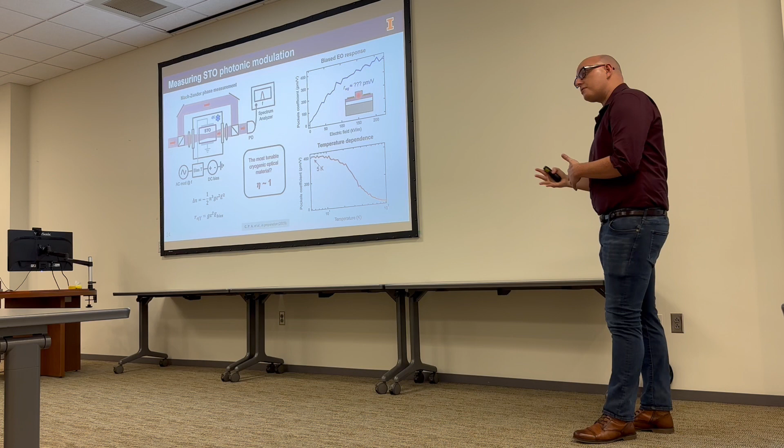We really think that we can start pushing towards this transduction dream of microwave-to-optics at low temperatures with efficiencies that approach something like 1.

So, we have lots of dreams, right? Part of our dream is to use this silicon carbide to mediate long-distance entanglement. Our other dream is to build these quantum modems by exploring wacky condensed matter systems and harnessing their nonlinearities for photonics, to build this dream of the quantum internet.

As I mentioned, this work is a mix of what's been done both at Chicago and Stanford. And I showed this at the IQUIST talk, so I'll show it again. But as mentioned, I'm here now full time.

We're building the labs. We're over in ESB, the North Building, the building north of MRL. So the labs are a construction war zone, but they're being built.

And technically my affiliation is material science. And I guess at some level it's because they put these posters up in the material science building. And I really do believe, if you really want to revolutionize quantum tech, you need to develop these new materials, silicon carbide, strontium titanates, that give you new functionalities.

And if you want to beat the limits of the current semiconductor industry, you need to develop new semiconductors as well. My other shout out is we had the cover article of Physics Today, I guess 2 months ago now, that outlines the dreams of silicon carbide, so you should go check that out.

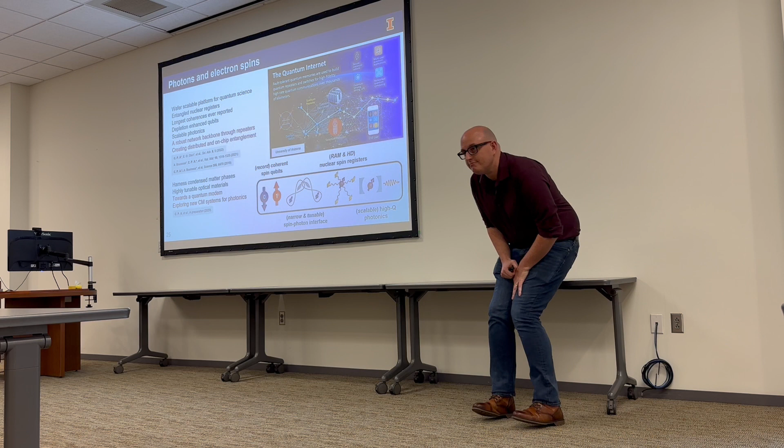Do you need Purcell enhancement to see the interference? No, it just becomes really low probability of success. The best experiments ever done in the field don't use photonics, although there was a paper 2 days ago. Anyway, they just collect light from the crystal with a high NA objective. That collection efficiency is something like 1% if you're doing really well, and their entanglement rates between distant spins is something like hertz or millihertz. So the links work - you know when they work because it's a heralded interaction. It's just not useful because it's so slow. Now if you were able to get 100% and have things be directional, that's where the photonics helps you. So it works as is, it's just not very useful.

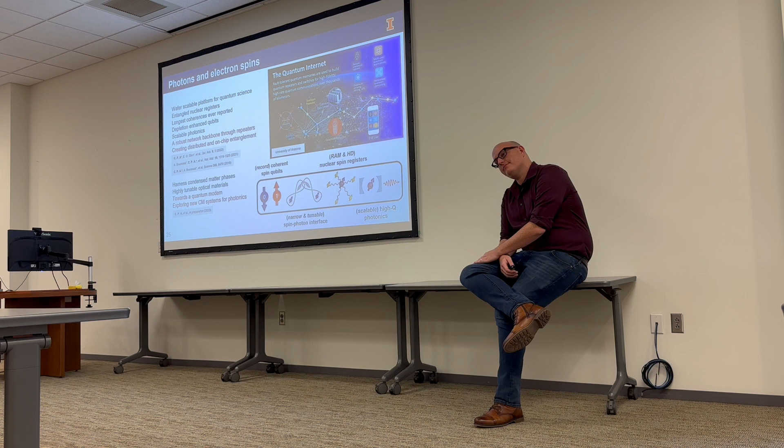I'm somehow troubled at a fundamental level that you found a material that you can cool down and it never drops into its lowest energy state, and that even at the lowest temperatures you're looking at, there is this quantum uncertainty about its arrangement of atoms. It's pretty wild, yeah. And so when I think about that, when you have that uncertainty, there's something else either that you know really well or you don't know really well.

You're looking to use this to transduce between microwaves and optical, but yet there's this fundamental noise in that system. So that's what's kind of troubling me, I'm trying to figure out.

No, I mean, I haven't really thought about it that way before. Because I guess in a regular nonlinear optical material, you cool it down, it's in that lowest well, and it's got a well-defined position of all the atoms. And here it's in this weird state where it's even unsure where the atoms are. I will say, in that state, it's not a nonlinear optical system.

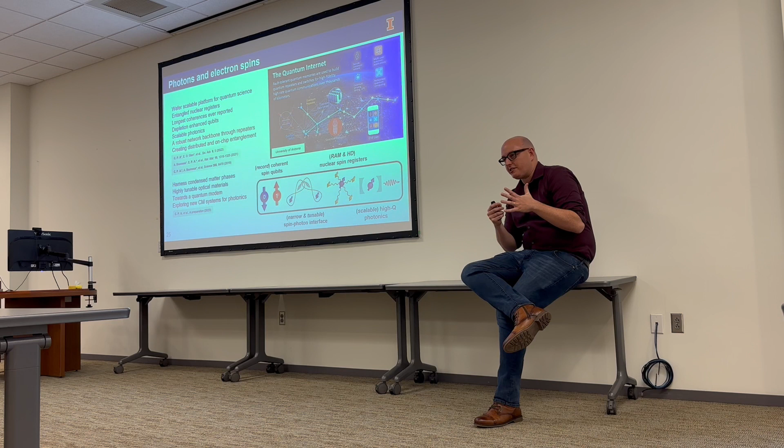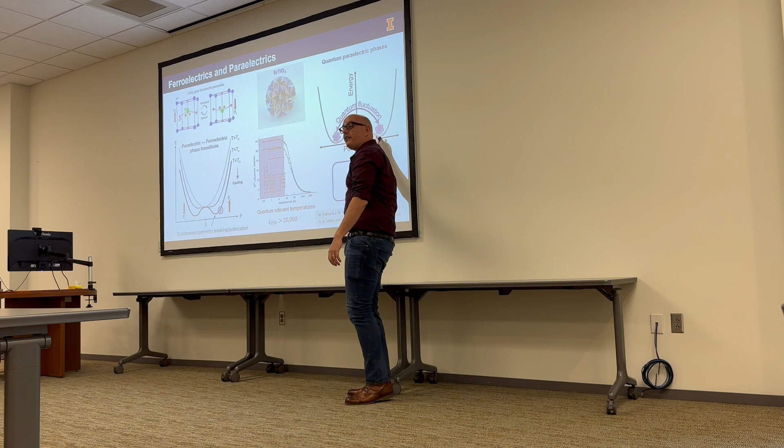So what we do is we actually bias it. One way of thinking about it is we determine which way all the atoms should go. By applying a field, we crystallize a phase and pick a direction, and then all those atoms are in place, pointing along the direction we're applying the field. So if that is a problem, I think it probably wouldn't be a problem for our particular use case, because we're applying this large field that tilts this whole potential landscape and then you fall down into one side. So there might be something there, but in our case it doesn't really matter so much. The answer is that it's not just going down to zero, it's going down to zero in the presence of this field.

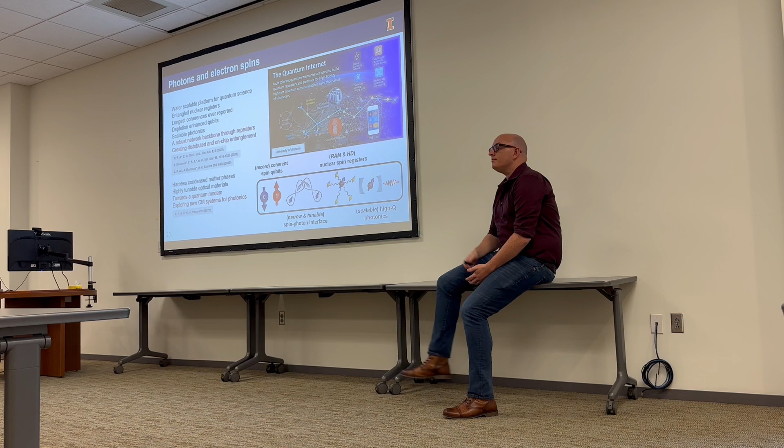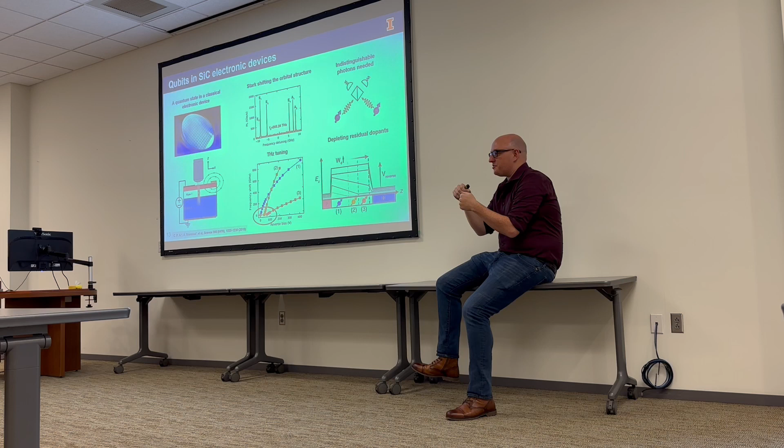That's a really good question. So there are some details I swept under the rug. Silicon carbide is a hexagonal crystal, and this divacancy is 2 missing atoms. Those 2 missing atoms can orient in a bunch of different ways in that hexagonal crystal, and each of those orientations has a slightly different local crystal structure and a different susceptibility to field. It turns out that these 3 defects happen to be 3 different types of orientations, which is why they have different slopes.

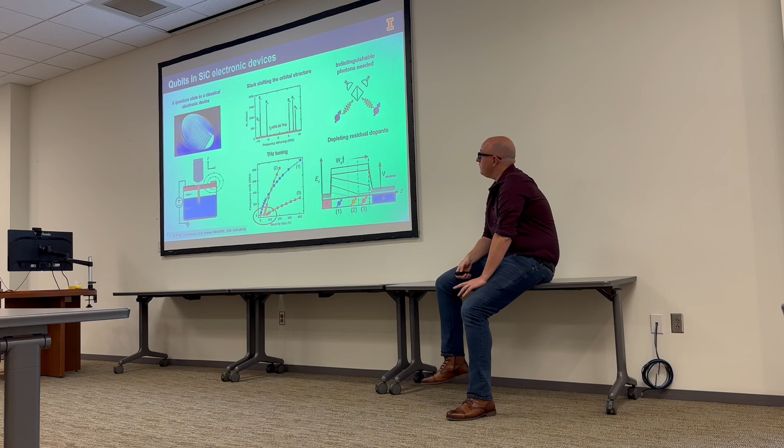Good eye though. If you could go to the slide where you had the directional control - this one? I think it might be one a little before, where you mentioned controlling the direction of the output of the photon. Yes, this one I think.

So shooting it out, there's a mirror over there, and I understand there is a statistical peak, where the more photons you have, the narrower you get, and you know how many reflections on average you require to get out. The question I had is, effectively when you're controlling for direction over here with mirrors, you're creating a small path length difference, and I was wondering what your sensitivity is to path length differences in terms of interference, because that's something I was considering.

So I'm not sure if I fully understand your question, but the defect is in one particular location and it doesn't move, and the cavity mirror positions also don't change.

And so those two things set all the phases in the system, and there's no interference problem, I think. Let me clarify this. I'm saying there is a reflection process, right? Yes, and it's a partially transparent mirror, which means for every cycle there is a probability P that it is transmitted. Which means for different photons, you'll have a distribution of how many cycles it takes before transmission, and each cycle introduces a delta L. So my question is, if you have a distribution of how many cycles it takes, how sensitive is it to this photon taking one cycle versus this one taking a million cycles? I understand your question now.

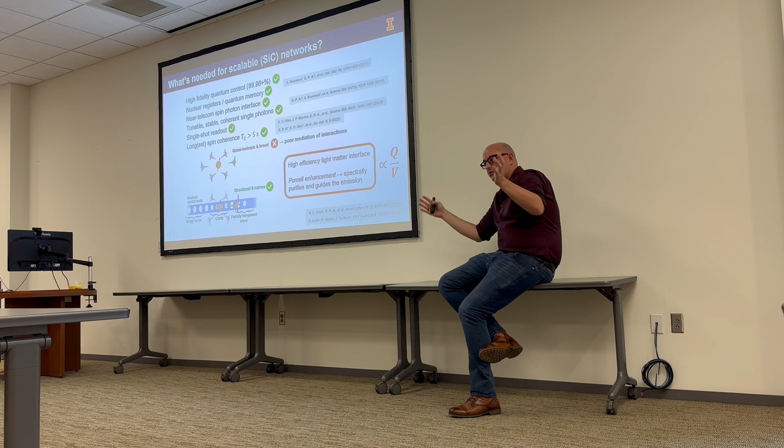So there are two things here. One is we have this two-level system. We bring it up to the excited state, it radiates light. The problem is it doesn't do that immediately. It has some lifetime that it lives in that excited state. So sometimes it radiates immediately, sometimes it takes 10 nanoseconds to radiate, and there's a phase difference there. Your wave packet has a very particular shape from the spread of all those phases, giving you some 10 nanosecond wave packet. That, fundamentally, we can't change or get around.

And then there's the second question, which is you put it in a cavity, and then there's this extra shaping of that light that you do, depending on the cavity line shape, which is sort of the inverse of the relation you're describing. So those things do matter. They change the shape of the output wave packet, the spread of phases and frequencies.

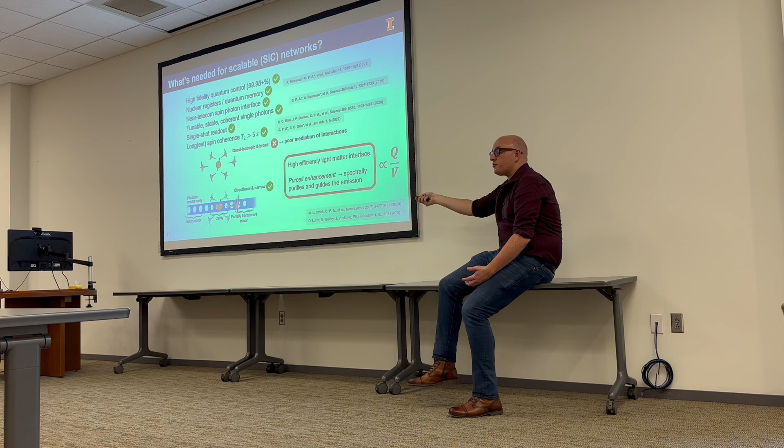Fundamentally, as long as this wave packet from one emitter and the wave packet from another emitter look the same, how broad or narrow it is doesn't really matter. But that means you want one emitter in one cavity to look exactly the same as another emitter in another cavity. So if the mirror reflectivities are slightly different, or if the atom has a different lifetime, you can have some problems. Another way of putting this: the Purcell effect reduces your radiative lifetime, right? So I think these things are basically related.

So putting things in a cavity makes the emission shorter. It also gets filtered through the cavity. So all these things play off each other. But they don't really matter at the end of the day, as long as the photons are identical.

In practice, what it does - I don't have a good figure for this - is when the photons interfere at the beam splitter, their length determines the coincidence window of this interference dip. And so if they become too narrow spectrally, or too narrow temporally, the detector isn't fast enough to see these time delays. So there's a technical limit you reach that's around 50 picoseconds. As long as you're in this nanosecond lifetime regime, you basically never hit that limit, and it doesn't really matter so much. Thanks.

I don't know if you covered this or not, but I was curious about how you excite your qubit. I'm most familiar with the T-center, and you need two-color excitation to really make that happen. So do you do the same thing, or how does it work?

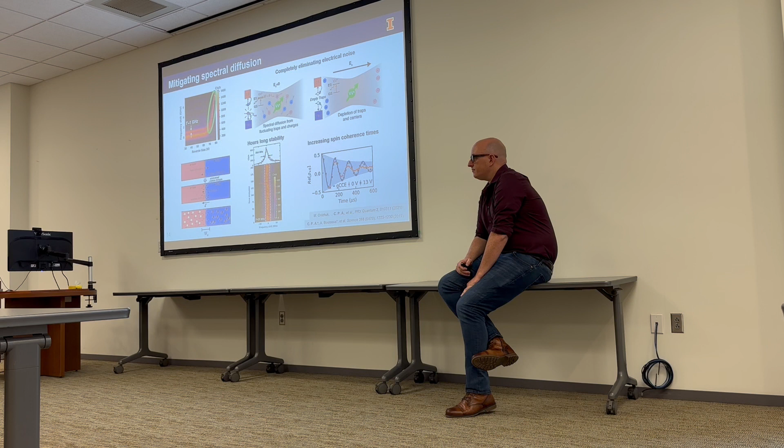So we do something super simple. We have our crystal, and we just have a microscope objective. We come down from the top, and then it luminesces back towards our objective. So there's no excitation and collection at 90 degrees from each other, no pump-probe thing.

In practice, what we do - I should have a figure for this - is we pump at one frequency, and then the emitter emits very broadly, and then we spectrally filter our pump from our emission. So there's a spectral filtering trick that lets you do this, because otherwise your laser just blinds your detector. As you said, you can do a cross-polarized thing to reject your pump; in this case, we do spectral filtering to reject our pump.

You can also do time filtering, like giving a one nanosecond boost to your system. It goes to the excited state, and by the time it luminesces, your laser's turned off. You can do tricks like that too. Time, polarization, space, frequency - those are your toolbox for doing filtering.